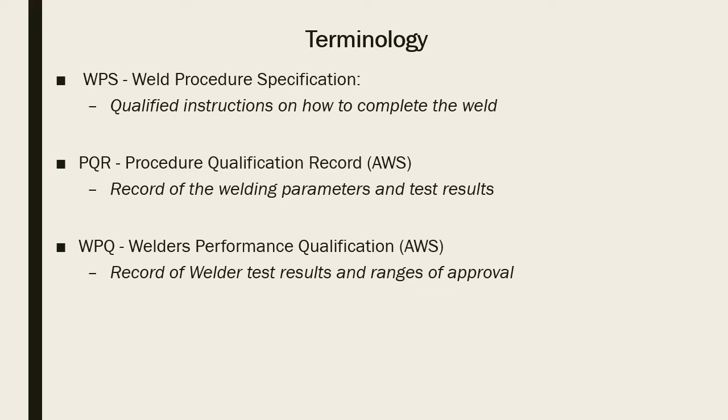Welder qualification: the primary purpose for performance qualification is to verify the ability of an individual to execute a qualified welding procedure specification to produce a sound weld. Welders can be qualified by visual examination and destructive testing, or radiographic testing.

Welders qualify to specific welding processes, not welding procedures. All variables are essential, and machine welding is considered a different welding process. So when it says all variables are essential, it's saying that those that are listed are essential.

For ASME Section 9, procedure qualification has essential variables, supplementary essentials, and non-essential variables. For welder qualification, everything is just an essential variable. This gets back to the fact that you're not qualifying to a specific welding procedure, you're qualifying to a process. Let's say flux core arc welding - you're qualifying to make sure the welder can deposit sound weld metal. That's the gist of welder qualification.

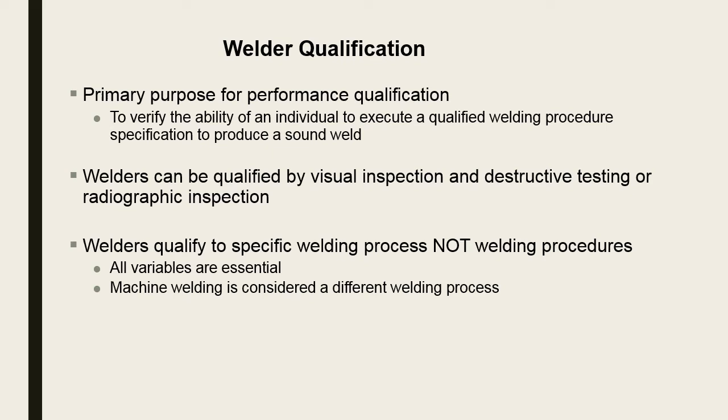The need for weld qualification: many variables influence weld quality related to the parts to be joined, the welding process, and the welding operator skill. The purpose of qualification is to demonstrate that welding procedures and personnel are adequately controlled and capable of producing acceptable results.

Such tests cannot foretell performance in production. Quality of the production weld should be determined by inspection during and after actual welding.

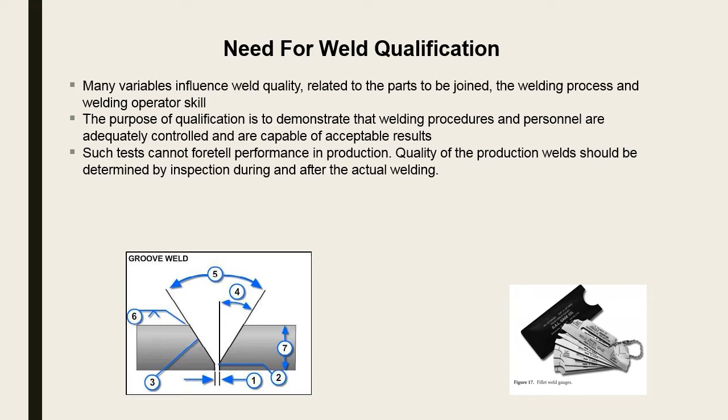Here's some codes and standards. The application of codes and standards that specify qualification requirements for welding include ASME boiler and pressure vessel codes, AWS D1.1 structural welding code, ANSI B31 power piping codes - you've got 31.1, 31.3, 31 whatever - and API 1104, standard for welding pipelines and related facilities.

This is just four general directions you can go. Each one of these has a specific direction or set of criteria for their qualification processes. They're all generally the same, but there are some specific nuances that go with each one.

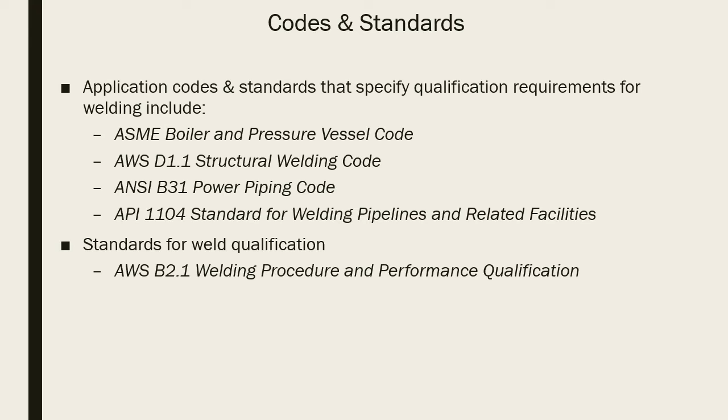Also, you've got the standard for weld qualification, AWS B2.1, welding procedure and performance qualification. That's an overall document put out by AWS that covers the general qualification of welding procedures and of welders.

Welder performance qualification is a test administered to a welder to determine the welder's capacity to perform a specific welding application. Welder certification is based on specially designed tests to determine a welder's skill and ability to deposit sound weld metal. This involves limited tests such as visual inspection, radiographic, ultrasonic, magnetic, and liquid dye penetrant testing, followed by appropriate mechanical tests such as transverse bends, macro examination, weld fracture test, nick break test, fillet break test, corrosion resistance tests, and ferrite number tests.

Once again, it depends on the code, the customer requirements, and what you need to get done and what their criteria are for production.

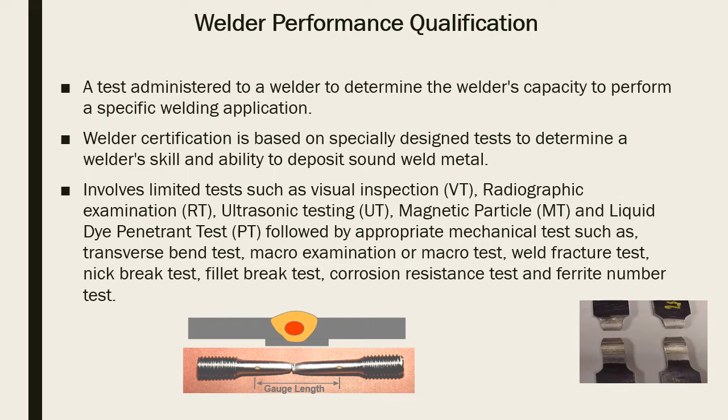Generally, for the most part, with ASME Section 9 and AWS D1.1, the welder is just going to weld out a coupon. You're going to do some bend tests and a visual test - visual first, then bend, or just an x-ray. But there could be something extra you need to get accomplished; if it's a fillet weld test given to the welders, then you're going to do a fillet weld break test. But the bottom line is welder skill and ability to deposit sound weld metal - that's really what we're getting at.

Terms and definitions.

Welder Performance Qualification Test is a WPQ. It's a test given to a welder for the purpose of demonstrating the ability to make sound welds and meet prescribed standards.

WPQ record is the record of a welder qualification test that includes the process, essential variables, types of test results, and range qualified. That's the piece of paper that's going to be in a filing cabinet somewhere or scanned into a computer that keeps track of what happened on that test. Usually you don't keep track of failed tests, but you could if you needed to.

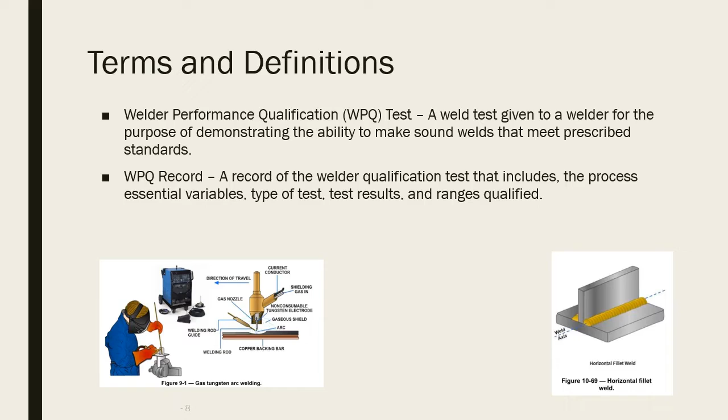When we're talking about qualification of welders and then WPSs and PQRs, there's a wall. Don't confuse the two sides of the wall. I stole this from Walt Sperko, who's the chairman of ASME Section 9. He gave me his blessings. I told him I was going to borrow his material, and he was good with it.

You've got a wall. You got procedures on one side and personnel on another. A lot of people get focused in, well, my welder isn't qualified to that procedure, I qualified him to another procedure. No, welders generally don't qualify to a specific procedure. You qualify to a specific process and a specific filler material. You don't qualify generally to say he can only weld with this procedure.

Because then you'd get bogged down in a paperwork nightmare, right? Imagine how much trouble it would be to try and produce welders that were qualified to hundreds of different welder WPSs.

The company I worked for had dozens and dozens of welding procedures for 7018 alone, all written for different customers, with all kinds of craziness on them. But our welders, you give them one test, and they're covered for all that stuff. Because there's only 5 or 6 essential variables in a welder when you qualify a welder, whereas a procedure in a PQR can have any number of essential variables and non-essential variables.

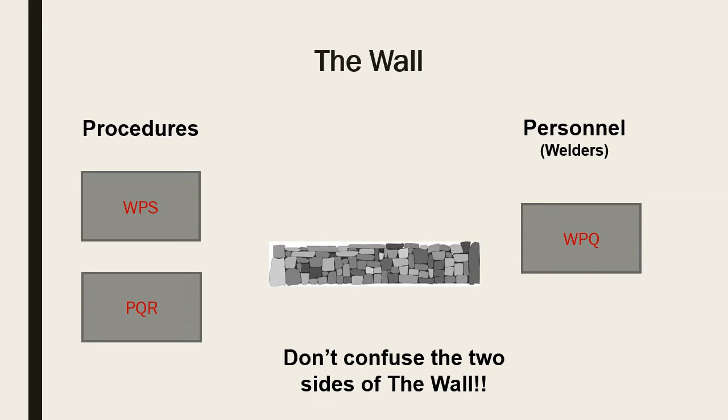Welder qualification: the range of approval is not as restrictive for welder qualification as for procedure testing. Welder qualification has fewer essential variables than procedure qualification testing. One welder performance qualification can cover many WPSs.

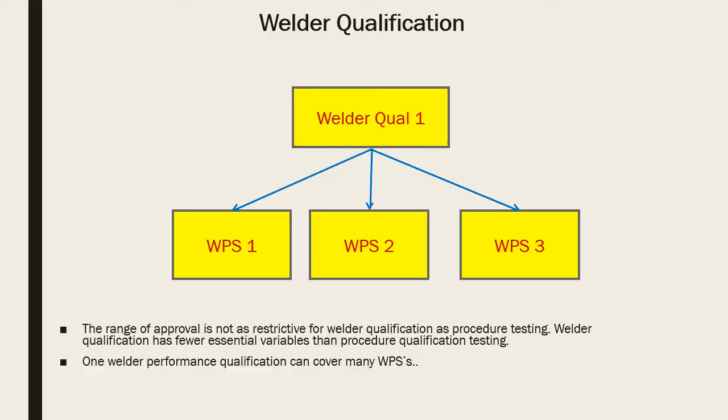Here's a welder performance qualification record from Fred's Welding. You can see that it's a pretty trimmed down version of some of the other documentation we've used. There's only a half a dozen, like we said, essential variables that you need to address, and there's a section down there where you write down the results - did he pass the bend tests, and maybe you had a macro etch or something else - you write that in there.

And then there's also the organization, Fred's Welding, and then the welding engineer and the date. Doesn't have to be a welding engineer - who's the responsible party? Fred's just had a welding engineer, so that's why they've got that written in that spot on the form. But you can see this is the documentation used to keep track of welder qualification.

So once you do this, you put it in the welder's file, maybe make a PDF file and put it on the internet within your company, so if other people need to access that information, they can access the PDF without rummaging through your file system. But this is one of the components that makes a good welding program work - welder qualification and documentation of what the guy is qualified to do.

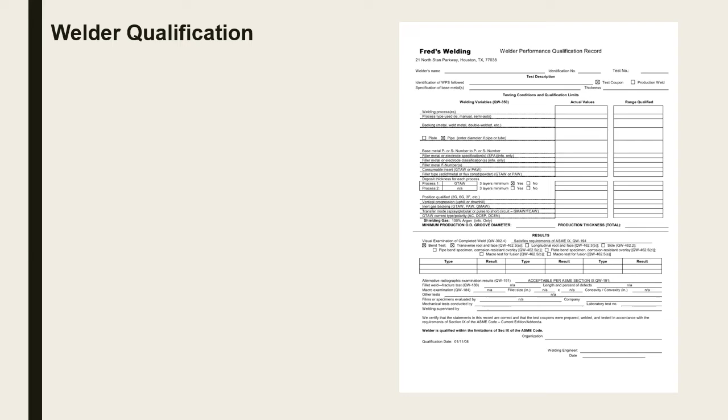Welder qualification. Here's the essential variables for welder qualification. You can see there's only one list for gas tungsten arc welding, and there's only half a dozen welder qualification essential variables. Remember when we were talking about essential variables for procedure qualifications for WPSs, remember how big that laundry list was? For welder qualification, it's just half a dozen. You've got: is the guy using backing, base metals, pipe diameter, filler materials, what positions he's using, is he going up and down in his positions, what's his vertical mode of travel, is he going vertical up or vertical down, do we have inert backing gas, and the polarity if we're on gas tungsten.

And it's pretty similar for the one on the left, which is gas metal arc welding. Transfer mode, inert backing, position, if we're going up or down in the vertical position, filler metals, what's the F number, etc. P numbers for material, base materials, etc. So welder qualification essential variables are a way smaller list than when you're qualifying a procedure.

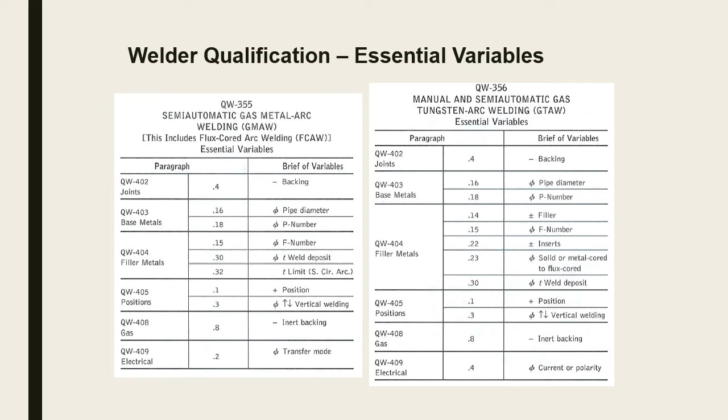So here's what I took from the essential variables in ASME Section 9, kind of broken down. Here's what you got to worry about with welder qualification: welding process, base metal composition group. What are we welding? Is it aluminum? Is it carbon steel? Is it titanium? What are we welding? The thickness, the welding position.

This is a biggie. This is where you can get in a lot of trouble, is welding position. You qualified your welders for horizontal, but they've been welding uphill and overhead, and good Lord, we don't have any qualification paper on them for being able to run in that position.

The base metal form, is it sheet, is it tube? Sometimes this is something that comes into play. A lot of times it is, because you'll have a guy who might be qualified to weld, let's say 7018, on plate, and then you need him to weld on a really small piece of sheet or a really small diameter piece of tubing. Well, you got to look in the code. Is this guy qualified or isn't he? So just because a guy is qualified to run in one form, flat, plate, whatever, doesn't mean he's qualified to weld in the same code if that material's a tube.

Type of weld. Is it a groove or a fillet? Fillet welders, if you qualify a guy with fillet welds, he's not qualified to weld on grooves. Groove welds, they can qualify, they're good with grooves and fillets for ASME Section 9.

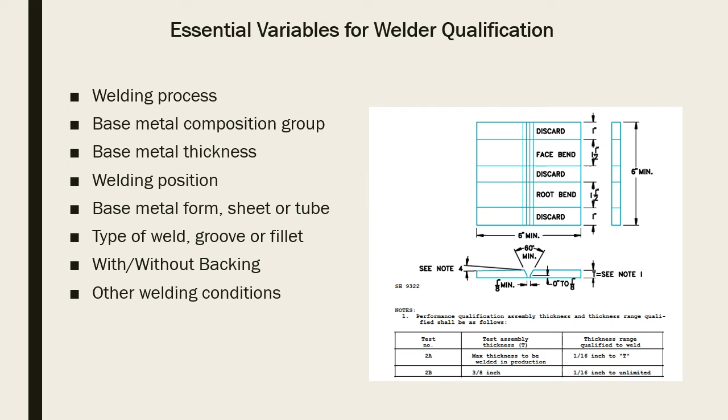Welder performance qualification. The performance qualification tests are intended to determine the ability of welders to make sound welds. A welder is qualified by radiography of a test coupon. A lot of times they'll just shoot it. You make the weld and then they're going to shoot it with x-rays, look at the film. Yep, he's good to go.

Or let's say I got a super hot shot welder that I worked with for years and I hire him, and I'm like, all right, this is my guy, I'm not going to test him. We'll just do the initial production welds. So we can bring him in, have him do a few production welds, x-ray him, and we're good to go. That's a little more risky because unless you know the guy and you know that he walks on water or he's super qualified, you're kind of rolling the dice there. And other times it's just visual and you're going to take some bend tests. Here's kind of a little variant of what you're going to look in on.

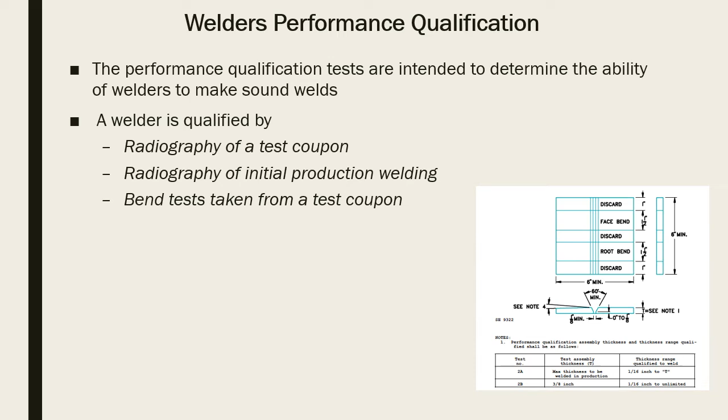They're going to cut out a face bend and a root bend out of this thin material, cut it, slice it, and call it good. And you're going to look at the bends and the bend test samples, and if it's good, the guy passes. If not, he didn't pass the weld test.

Here's QW-452.1 test specimens out of ASME Section 9. It tells you, if it's less than 3/8 of an inch, you're going to do a face and a root bend. If it's 3/4 of an inch and over, you're going to do 2 side bends. From 3/8 to less than 3/4, you've got a couple of different options, so check your notes, but you're generally going to do some side bends. The reason is once you get over about 3/8 of an inch, you can't do a face bend or a root bend, it's just way too thick a material. So that's why you do a side bend on thicker material.

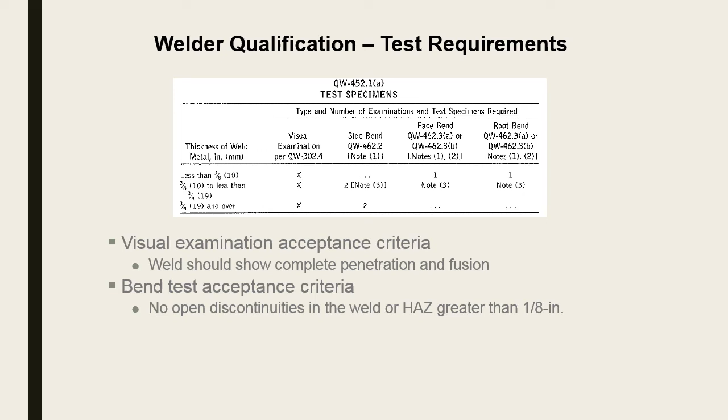Visual examination: the weld should show complete penetration and fusion. The bend test acceptance criteria: no open discontinuities in the weld or HAZ greater than 1/8 of an inch. That's general for most weld codes, though there's going to be some subtle differences. ASME Section 9 and AWS D1.1 have a couple of subtle differences on the acceptance criteria and how they're measured in regards to openings, when something opens up. But that's the general gist of it - most of these codes, you're going to do a bend test, then look and make sure there's no openings or a crack or some kind of discontinuity that would be cause for rejection.

Welder qualification test requirements - I'm not going to go through this. This gives you a general idea of what the requirements are.

This covers the acceptance criteria for radiographic testing. You can't have any slag, elongated slag over certain lengths, or grouped slag, or whatever - here's all the criteria. You can see it's fairly involved. Each code has its own criteria.

And I keep preaching this - a lot of this welding stuff is you need to read the code, the code that you're working to. I don't memorize codes, I never did. I had a general familiarity with them, and I know where to find stuff, but I didn't have it fine-tuned on what was acceptable and what wasn't. My mind doesn't work like that. So I knew where to find it, but I would go and read the code or the specification every time.

So anyways, here's a general idea - if you're going to use radiography to qualify your welders, here's the acceptance criteria for that NDE process.

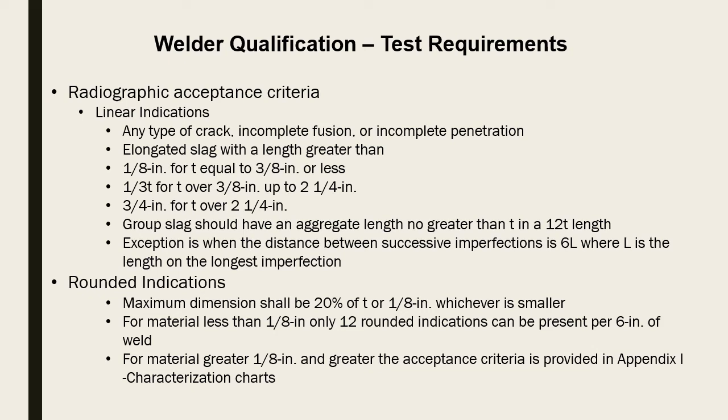Filler metal F numbers - this is a really important one because it's based on the usability characteristics, i.e. the ability of welders to make satisfactory welds with a given filler. So let's go from F5 up. F5 is austenitic stainless steels and duplex stainless steels in the shielded metal arc stick form. Those things run completely different than stick welding with carbon steel, so they've got their own F number.

Then when we get to carbon steels, we've got F1, 2, 3, and 4. F1 is all the flat position stuff, like 7024 or 7027 or whatever - pick a number up there in the F1s. All that stuff's meant to run flat, you can't run that overhead. So if a welder qualifies with that, that's all they can run.

For the out-of-position stuff, F2, you've got 7012 or 7013 or 7014 under F2. If I qualify with F2, I also get F1. Same for F3 - let's say I qualify with 6010, I could weld with 7012 and 7024. F3 qualifies me for F2 and F1. And if I qualify for F4, which is 7018, 8018, all the low hydrogens - 7015, 7016 or whatever - I get F3, F2, and F1 as well.

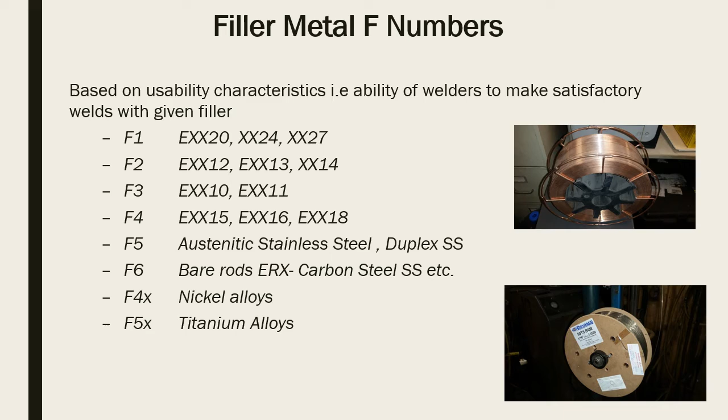So the welder qualifies with that F number. You got to stay in your swim lane and weld only with that F number, unless there's some provision in the codes that give you other ones. Like I said, if you qualify with F4, you get F3, F2, F1. You got to read the codes, though. The bottom line is you got to read the codes and be conversant in the codes.

Welder performance qualification. Once a welder passes a test or a series of tests, their employer or a third party will certify the ability to pass the test and the limitations or extent they are qualified to weld, as a written document called a welder qualification test record, or WPQR.

This document is valid for a limited period, after which the welder must be retested. Some qualifications are only valid for a single project, while others are unlimited as long as the welder does not go beyond a specific length of time without performing that specific welding type. This period is often 6 months.

So this is where you get into keeping track of your welders and whether they've used a process. We used to keep a log, a continuity log. So a welder would have to weld with a specific process, let's say flux core. Every 6 months, I would need to see that welder weld with that welding process.

If he leaves the company, he loses his certs. If he doesn't weld with that process within 6 months, he loses his certs. We had everything set up to do it every 4 months, so that even if I missed something, I would still catch it on my continuity log because it was every 4 months - we kept it a little shorter. I would just write down that I had seen that.

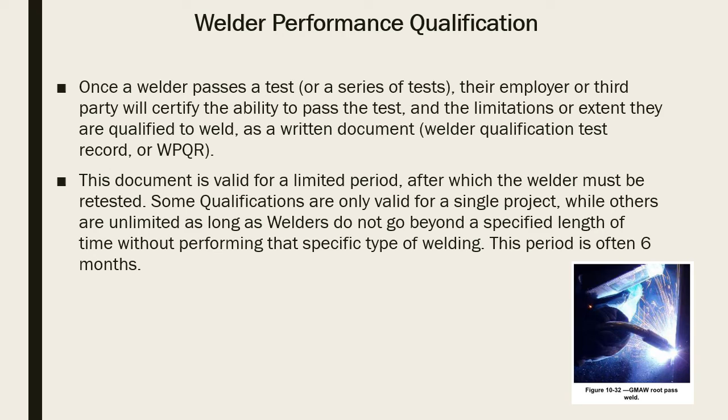So it's documentation. You have the welder tests - once the guy passes that test, he's good. And then the other part of this is, it's only good for a limited amount of time. He's got to prove every now and then, within 6 months, that he still has proficiency to deposit sound weld metal using that welding process.

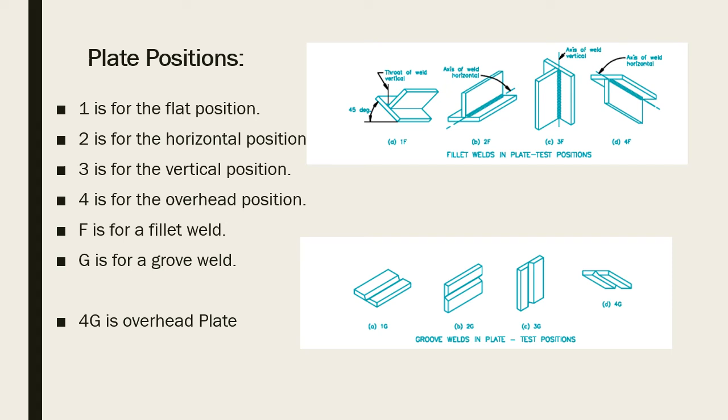Plate positions. This gets into our numbers with positions, 1F, 2F. With the positions, 1 is for the flat position, 2 is for the horizontal position, 3 is for the vertical position, 4 is the overhead position. F is for fillet weld, G is for groove weld. So using this nomenclature, 4G would be an overhead plate test, or 4G is an overhead welding position.

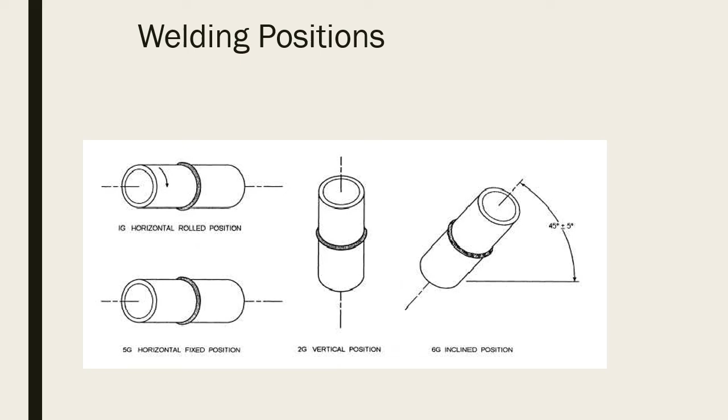2G in the vertical position, this is just with pipe - it's the same as 2G plate. And then we've got the 6G, which is the granddaddy of them all. 6G pipe - you qualify on this, you get everything. If you qualify on 2G and 5G, that's the same as doing the 6G position. So when we talk about welding positions with pipe, these are the main ones we're talking about.

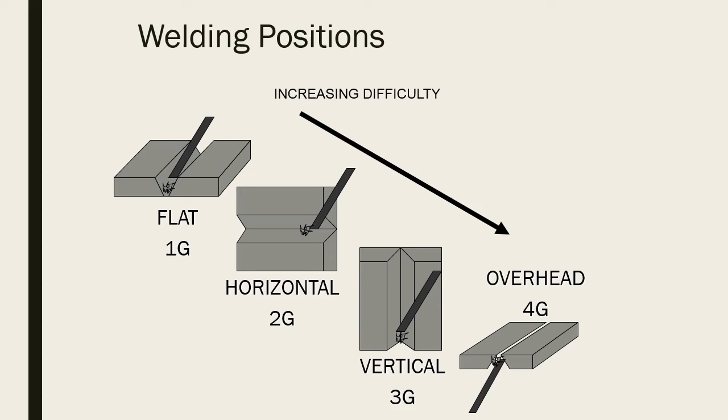Generally, if you qualify for something, you get the ones below it. Depending on the codes and how things are written, different codes have different criteria for what is more difficult. But generally, if you qualify 3G, you'll get flat 1G. If you qualify overhead, you might get something else. Each code's different, you've got to read them. I don't have them committed to memory, I've got to look on the little chart every time. But generally, if you do 2, 3, or 4G, they'll give you 1G, which is flat.

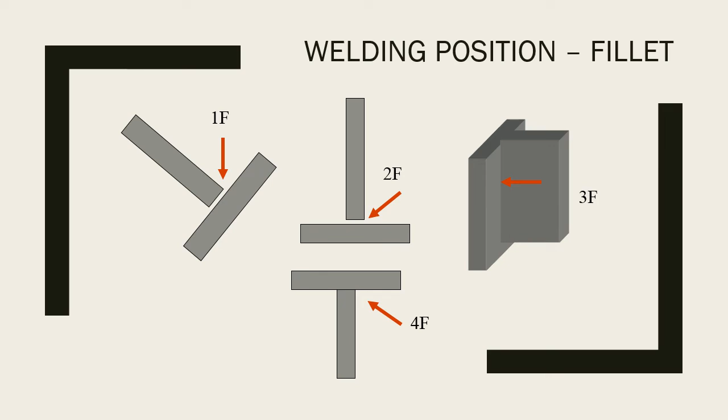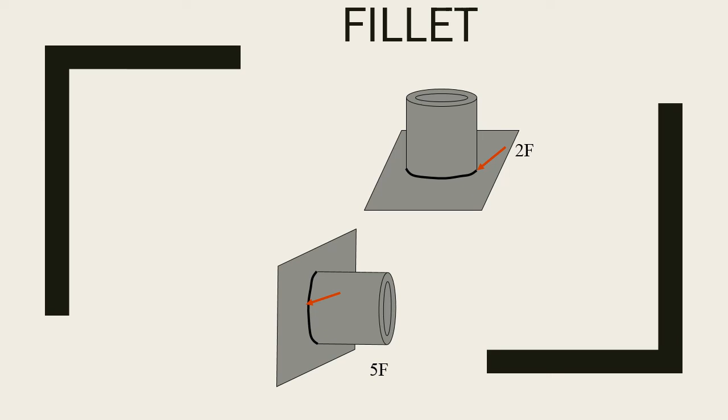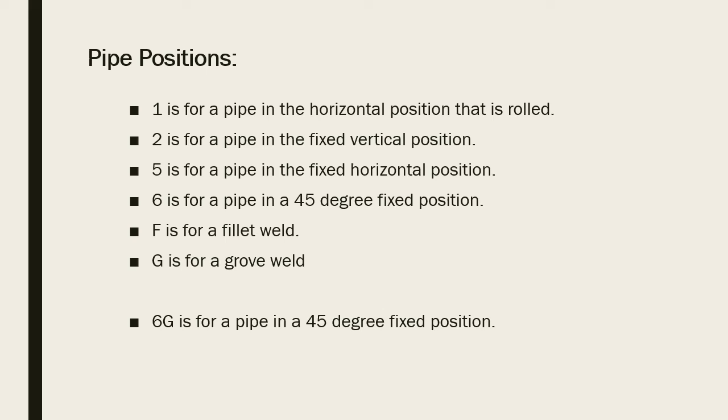So yeah, it gets all back to being able to speak the language of welders, and this is part of the nomenclature and the language for being able to speak pipe positions, because they gave them these numbering systems so that you could talk back and forth. Okay, it's in this position, as opposed to trying to describe it - well, I had it at this... no, it was at the vertical position. So this language is pretty much universal across all welding positions or welding codes in the United States, and anybody that uses our codes. I don't know how the Europeans do it, but this is our system.

Key terms and definitions. Essential variable: a parameter that when changed outside its permitted range requires requalification. Any condition changed that could affect the quality and integrity of a weld deposit and would necessitate requalification. A non-essential variable is a parameter that when changed does not require requalification - any condition changed that does not affect the quality and integrity of the weld deposit and does not necessitate requalification.

This would be like, for example, if you qualified a weld procedure using 1/8 inch filler material and then you wanted to use 3/32 inch filler material. Some codes might require you to requalify, but for a lot of codes that would be a non-essential variable. You're just switching from 7018 at 1/8 to 7018 at 3/32. Like I said, some codes might require requalification, but for the most part that would be a non-essential variable.

Procedure: the detailed elements with prescribed values or ranges of values of a process or method used to produce a specific result. Procedure Qualification Record, PQR: a document providing the actual welding variables used to produce an acceptable test weld and the results of tests conducted on the weld for the purpose of qualifying a welding procedure specification.